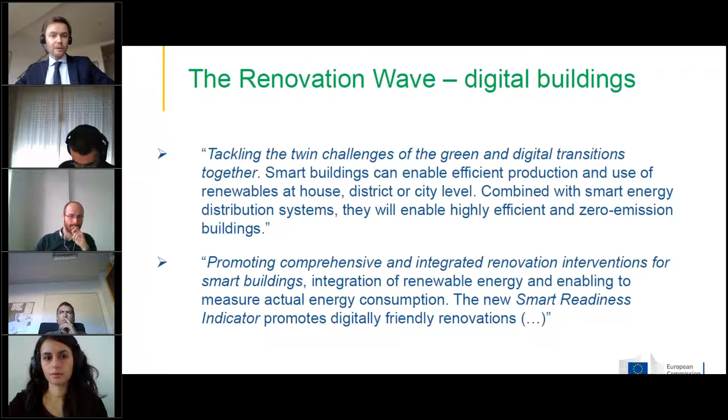Smart buildings are also highlighted in the areas of intervention of the initiative as a key component of comprehensive and integrated renovation interventions. In relation to this, the Smart Readiness Indicator is referred to as an instrument that can promote digitally friendly renovations.

The Smart Readiness Indicator is, I'm sure, something you've heard about, because at least some of the projects represented in this consortium had to take this initiative into account, even at the stage of proposal preparation. Just to give the context: in 2018, the revision of the Energy Performance of Buildings Directive introduced a requirement for the Commission to establish this new instrument, the Smart Readiness Indicator.

In essence, the aim is to introduce a rating of the smartness of buildings, a bit the same way as energy performance certificates allow rating of energy performance of buildings. Three areas of smartness are considered: optimal operation, response to users' needs, and energy flexibility.

So an important point with the SRI is that, though it is established under the Energy Performance of Buildings Directive, it goes beyond energy performance in terms of scope.

The development of this SRI has been supported by 2 technical studies, and Mr. Verbeke will give you further details afterwards. Just to mention that it has represented a tremendous amount of technical work and extensive consultations with all stakeholders.

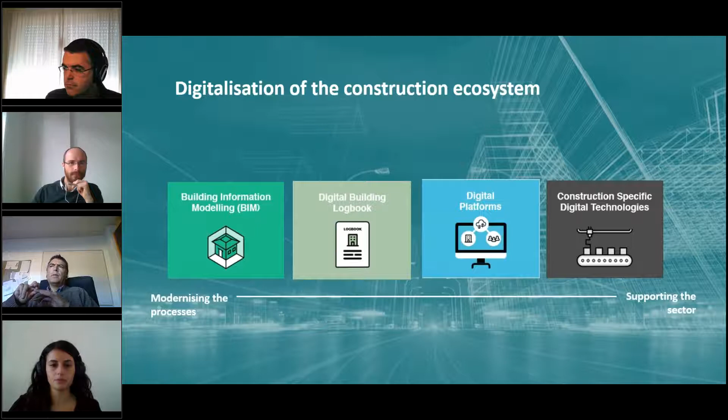One very good example of how we can valorize the information available is the digital building logbooks. They are such an example of optimizing the sharing of information. They're also a very good example of how the digitalization of the construction sector can contribute to smarter buildings and the other way around. Digital building logbooks act as a single repository of all building-related data, and they can improve data availability and collaboration across the value chain and the construction stakeholders.

As a result, they can contribute to the European data economy, and when data governance issues and data sharing models are in place, we can really imagine a huge contribution of the digital building logbooks to the European industrial and data strategies.

Also, they can play a lot of role in making information available about equipment, materials, and products that have been used in every building, their quantity, their recyclability, their performance, many information linked to that, therefore enabling circularity in construction. And this was already validated through the new Circular Economy Action Plan, which mentioned clearly logbooks as a tool that can really contribute to the circularity of buildings and the built environment.

The Commission is currently working towards an EU framework for digital building logbooks through a dedicated study. Later in the workshop, the project leader will present you in detail what is the work that has been done through the study to define the digital building logbooks, to analyze and assess existing initiatives, their gaps, and propose actions to the Commission and ways forward.

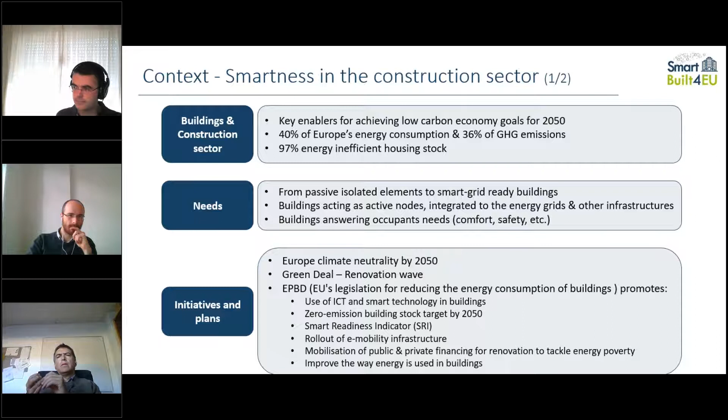And what is important is that most of the technology, most of those technical barriers have been or are currently tackled thanks to many collaborative research and innovation in EU-funded projects and national initiatives. Many of the technologies are already there. It's more a matter of integrating those technologies, having them interoperate in the context of the built environment, and trying to break silos and share data and information. So the target of SmartBuilt4EU is really to remove the last barriers slowing down the improvement of the energy performance of buildings.

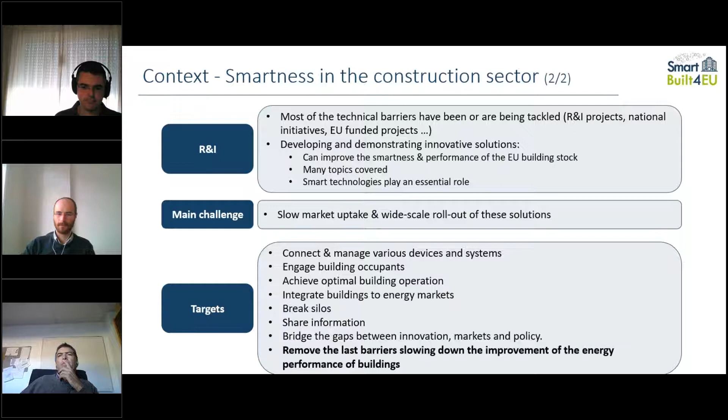So, as mentioned, our intention is really trying to integrate as much as possible this ecosystem associated to smart buildings, which is for sure complex and fragmented due to the variety and heterogeneity of technologies and stakeholders involved. And the overall value chain can be structured around different levels.

There is the sub-building level with the market players related to building components, including ICT equipment, active material and equipment, renewable technologies, and so on. The building level, with players related to building design, operation, and occupation, data management, the optimization of uses including energy uses. The connected environment level with actors related to the different networks that can interact with the building. And last but not least, the regulatory and financial framework level with actors who can incentivize and promote more sustainable energy systems and behaviors, more inclusiveness in the built environment, and innovation in the domain.

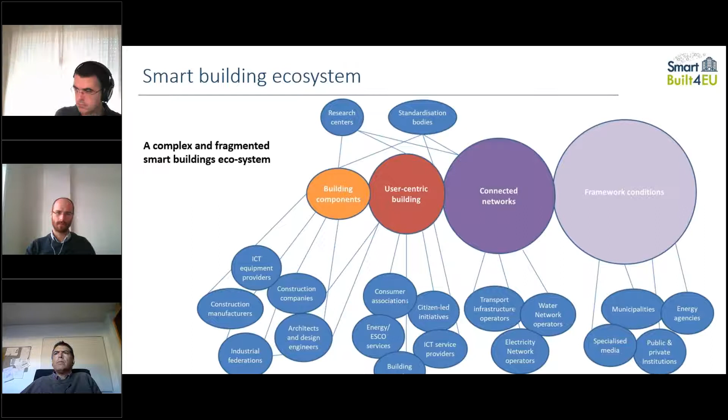And Electra introduced this a little bit with respect to those regulatory and financial frameworks, including public procurement.

So the project objectives, in a nutshell: mapping and consolidating the smart buildings innovation community in Europe, but also potentially interacting with actors outside Europe, sharing the knowledge and having a set of supporting activities for this smart building innovation, in particular through task forces and workshops. We'll be back to that point later on.

Contribution to the promotion, experimentation, and rollout of the SRI as a follow-up of the two first studies on the SRI, and the upcoming one, which is dedicated to implementing the SRI at national level. And at the end of the day, being able to keep on feeding the European Commission and the European Union as a whole with research and innovation activities, potential future research and innovation activities, and policy recommendations. And this last one will be, of course, through some kind of strategic research and innovation agenda.

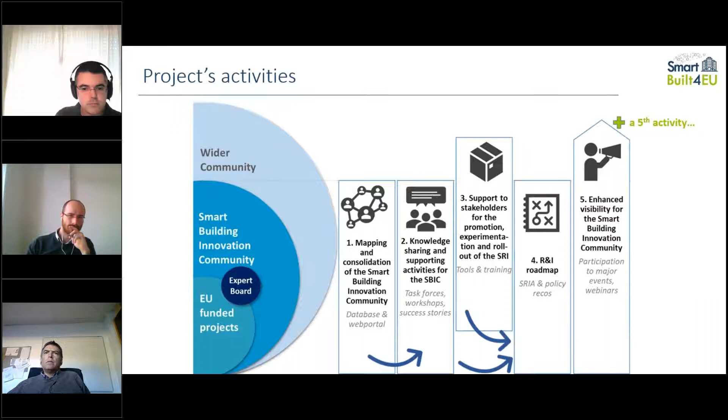So the activities are this one, plus a fifth one, which is about enhancing visibility for the smart building innovation community. We expect to leverage the EU-funded projects and some key players and key experts through an expert board, through a smart building innovation community where we expect that all of you will be happy and keen to participate, and I would say the wider community of all those who are at least interested in what we're going to develop.

So I'm just having a quick look at the various activities without getting into the details because time is flying. But the first activity in terms of mapping and consolidating the smart building innovation community is summarized in this slide. It's about having as comprehensive as possible identification of innovation leaders and potential replicators, and having those ones being active partners in the smart building innovation community. For that, we target in particular the EU-funded projects and consortia, so all of you who are going to present some very, very interesting projects in the area, and trying to foster interactions at all levels, including the national and regional level, and not only the European.

And we plan to do so, of course, in particular through a web portal that will integrate and build on existing web resources. This is ongoing because the project has just started, as I mentioned, 3 weeks ago, but we will rely on some well-established existing web resources.

The second activity is dedicated to this notion of the very active community relying on publicly funded research and innovation projects, the wider community from smart cities and their networks, from industry R&I partnerships, including those under preparation of the Horizon Europe Framework Program, and some consumer and citizen-led initiatives.

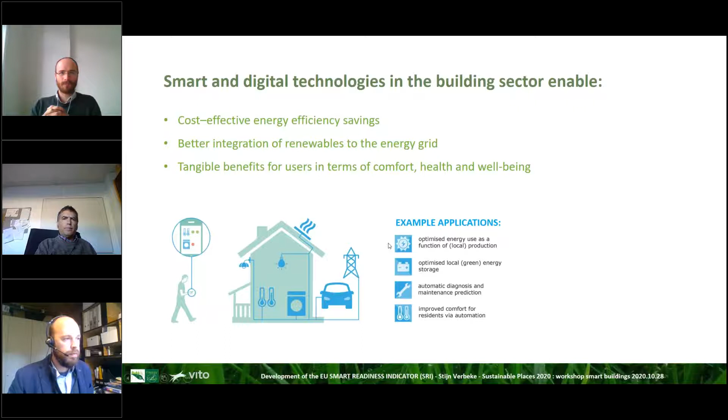Well, the context was very well introduced by earlier speakers, so all of you are aware that smart technologies have tremendous benefits, but the conclusion is that in the broader public, these benefits are not always well known. Also, the building sector can be more of a traditional nature.

And hence, in the review of the energy performance of buildings directive in 2018, there was an article noticing the introduction of a common union scheme for rating the smartness of buildings, the Smart Readiness Indicator. So it was already in the EPBD in 2018, but the EPBD at that time did not specify how this SRI method would be calculated. It's just a concept of an indicator.

And the intention of what it should do, so raise awareness and motivate consumers and support the uptake of technology innovation. But the real details of this indicator needed to be further developed.

What the EPBD did include in its Annex 1A were three main elements that should be considered in the evaluation of the smartness of a building, namely the way in which a building can interact with its inhabitants and its users.

So managing the operation without too much involvement of the users, but also providing information on actual performance, etc. Second one is making use of these smart technologies to make your building operate more efficiently. And third one, also very importantly, is to make sure that your building can interact with the grid.

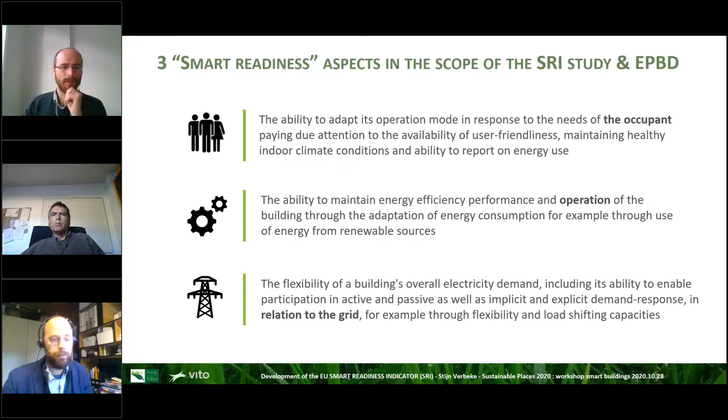So these were the main elements, but to have this further elaborated into a feasible assessment scheme, DG Energy commissioned two consecutive support studies, one running from March 2017 to August 2018. And actually it was during the execution of this study which explored the benefits of SRI that the EPBD was already updated. Then a second technical support study which ended at the end of June 2020.

And Vito had the pleasure of coordinating both technical support studies. Of course, they were executed with a consortium, and the second consortium was including Waide Strategic Efficiency Europe. And so the study further developed the methodology, but also looked into implementation pathways and the impact of this instrument across Europe.

In the coming few minutes, I will highlight some of the main elements, but of course, there's much more. And if you want to know more, on our website smartreadinessindicator.eu, you can find both a summary, which is hopefully quite meaningful and readable - I believe it's 25, 26 pages - but also the full report together with its annexes, a few hundred pages in total.

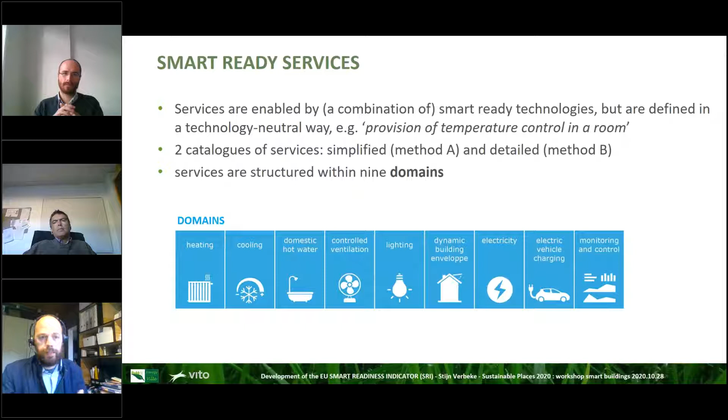To give a bit more detail, we ended up with having 2 catalogs. We have the detailed method, which is suitable for more intricate, more complex buildings such as office buildings. But we've also devised a simplified method for residential buildings to further ease the methodology for this specific type of buildings.

The core of the assessment is for an assessor to go through a building and check the functionality levels implemented. Here you have an example on heat emission control, various functionality levels from a non-smart default without automatic control to a fully automated, also checking presence control, for example. So the basic assessment procedure is checking which services are relevant and then to what extent are they implemented.

What happens next, automatically as part of the calculation methodology, is checking the impacts that these services have. We're not just counting the amount of services present in a building, we try to evaluate the eventual impacts of these technologies. There are multiple impact categories, and as mentioned before by Sylvain, it's not purely about energy. It's of course an impact category, but the other impact categories we have are maintenance and fault prediction, comfort, convenience, health and well-being, information to occupants, and grid flexibility and storage.

We think all these elements are critically important to be able to call a building a sufficiently smart building.

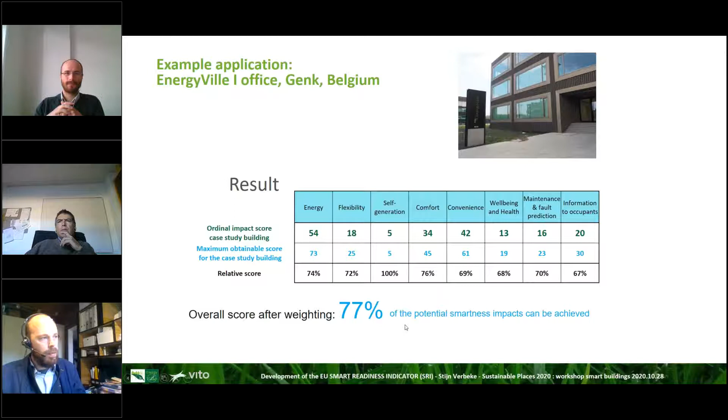Now, this is a hard number to communicate, so other steps in the process have been checking how we can, for example, translate this into an A, B, or C score, which is more easy to communicate.

During the technical support studies, we tested this approach ourselves, but also had many stakeholders participate in the testing. In total, 112 assessments have been carried out, showing the feasibility of the approach, also in terms of efforts and required expertise of the assessors.

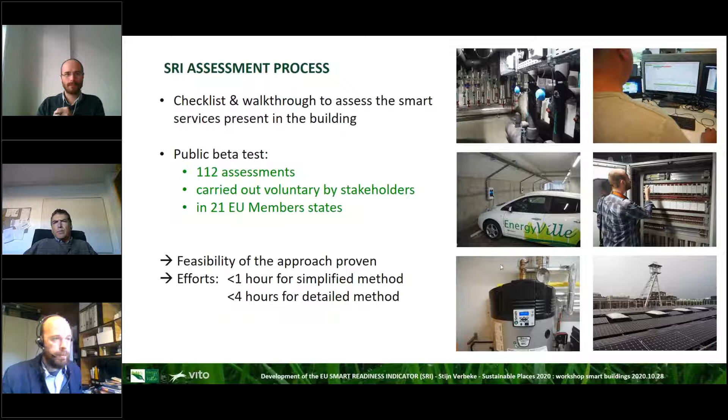For the simplified method for residential buildings, it comes down to less than 1 hour. For the more complex one, about half a day. This could, for example, as part of one of the implementation pathways, fit to be done together

with an energy performance certification as one of the potential implementation scenarios. Next, we also looked into graphical design options, tested it with focus groups, and also tested how we can convey other messages, for example, on interoperability of technical services, which is a very difficult and critical element. I'm sure we can continue that discussion in the SmartBuilt4EU project, and pretty sure many other research projects are also working on this specific theme.

We also did an evaluation of the impacts of the SRI and concluded that there are very important positive effects, and these come from two sides. One, just doing the assessments and creating this awareness. But we think equally important is that through the SRI and this list of services and functionality levels, we can also create a common language to describe different technologies and market them, for example. So this is what we refer to as both this pull effect and a push effect.

Coming to the conclusion, the technical study team concluded that it's a cost-effective instrument, that there is great interest of the market, and that the methodology is simple, actionable, and requires acceptable efforts. We're very happy to know that a few weeks ago, the Commission seemed to have agreed on these statements and have effectively adopted the core of the proposed methodology in the legal acts right now.

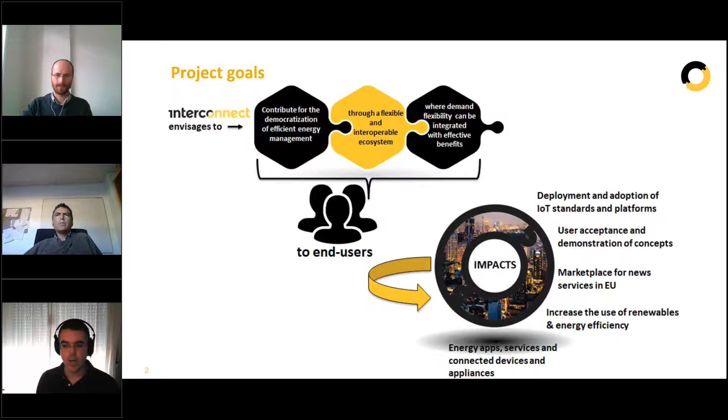So this means dealing with a lot of areas here. Some of them are quite well known for the participants here, I'm sure. So we're dealing from this front of ontology to interlink that with the digital platforms to make sure that we are able to support IoT-based solutions, blockchain implementations, on the side of the energy negotiation, smart contracts, and so forth, which relies basically on the IoT implementations. As you will see,

we have several large-scale pilots where we intend to demonstrate all of this. We also have one particularity for those that are not aware, which is the financing through open calls. So we have a cascading element within the project. We'll get to that. We need to have this integration with cloud-based systems or local systems.

So as it was already mentioned in the presentation, we are agnostic to the technology in itself. We're more concerned on the way information takes back and forth the path between the systems, and to ensure that the final service and the functionality is fulfilled. We have the electric grid, of course, to integrate all of this, and we have, I would say, transversal to this topic, big data that's being produced everywhere, cybersecurity elements and privacy tied with that, and standardization, where we are mainly focused on. So this is the path that we need to go through.

So in terms of outputs that the project is set forth in having, the function is to develop components for residential and non-residential applications. So this is the tie directly with the buildings. As you will see, we have quite an extensive set of buildings within our demonstrations where we are intending to test energy, non-energy services. And I'll detail in a while what we mean by that.

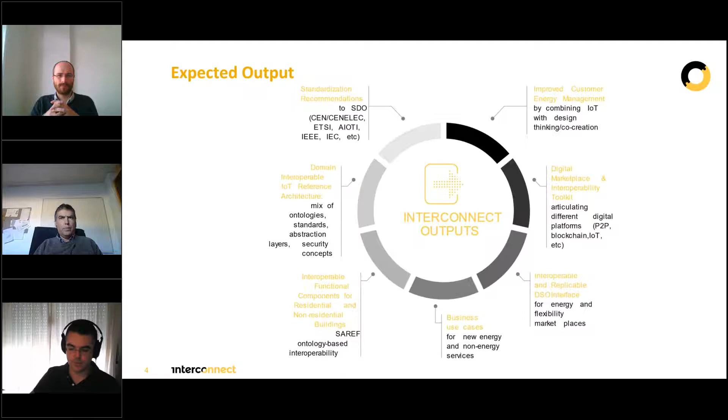As mentioned earlier, we're looking at two different domains: ICT domain and energy domain. On the ICT side, we are set to support, and these are some examples of the functionalities and technologies we're looking at depending on the application. Basically, we're focused on blockchain implementations, big data support, peer-to-peer mechanisms for service implementation, privacy-preserving functions, and cloud-enabled computing support. This does not mean we need to focus on this strictly, we can have a mix of these ICT tools and technologies provided.

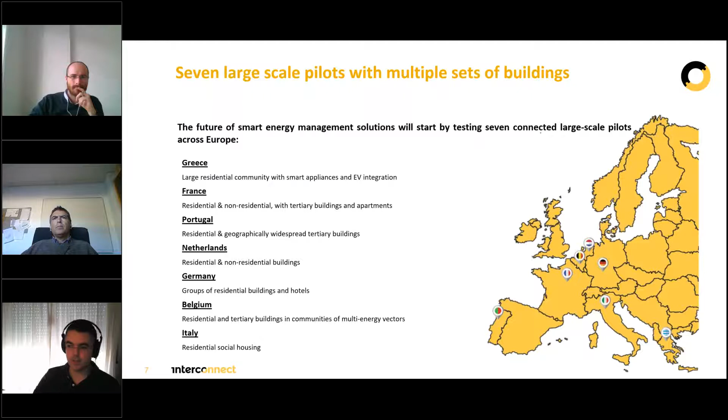So this is the kind of building and service set we're looking at—it's just an example, not comprehensive. We're looking at residential houses: independent houses, apartments, single and multiple dwellings, and common spaces where different services can be supported. One particular service being explored everywhere with different shades of gray is electric mobility, because it's a hot theme with a lot to explore across different buildings. Also non-residential buildings, including supermarkets, hotel chains, schools, offices, and even a science park. It's quite comprehensive—we should have enough background and material to study some of these implementations.

Again, there's the part of ICT and connection related, and the part of energy and services, which isn't a surprise—we've seen this already in previous presentations. Energy-wise, we're focused pretty much on the use of flexibility combined with optimal use of energy within the building, trying to leverage this together with cost reduction and actual energy use reduction, and the associated CO2 footprint reduction, not only through efficiency increases in energy used in buildings, but also through integration of renewable sources.

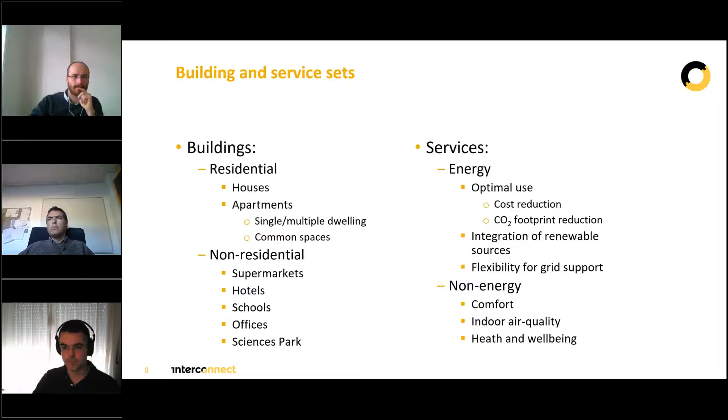On the non-energy side, we're focusing on comfort, indoor air quality, health, and well-being, which need to be tied together, as we've seen from the building classification, to provide a ranking toward the behavior of the building. It's not just about reducing energy or being more CO2 friendly—it's about making sure the non-energy system is also fulfilled. So by nature, we're a project that deals with a multi-level and multi-domain perspective.

So when we're talking about the end user, we need to clearly distinguish when we're talking about data, and one of our challenges is to make sure that the data flows within all of these topics within the different domains. But when we are talking about filtering and having data treated and available between machines, we also need to be aware that part of this data needs to be also treated and worked when presenting to the humans.

This allows, for instance, whichever is the service provider, ranging from electric mobility service to a full-blown flexibility management on a non-residential building, with HVAC systems and other systems available, that all in all, whichever is the provider, that same set of functionalities are still there, still available to be used within the user of the space in the building and the provider of the service, which can be multiple.

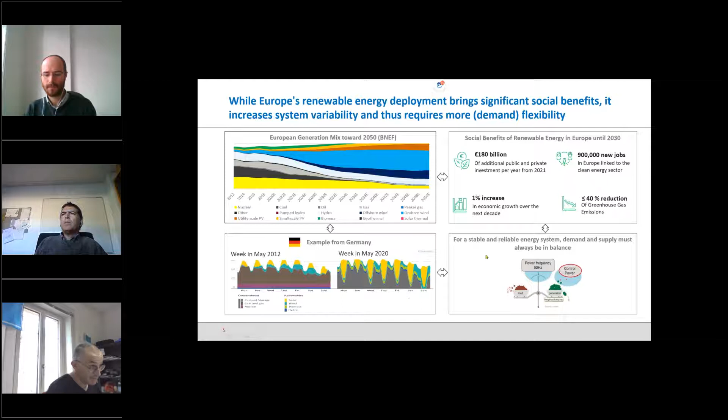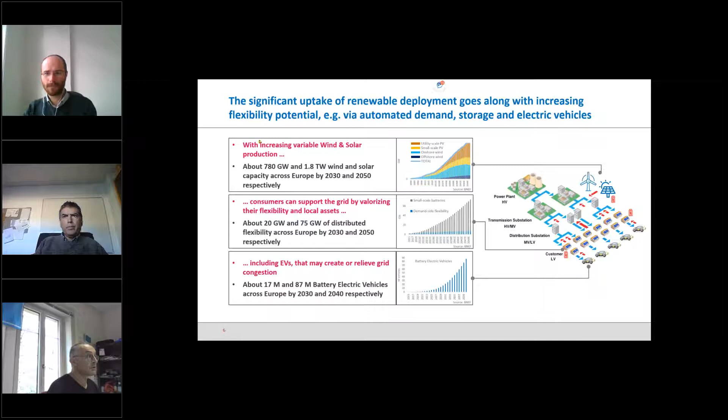So in line with what I was saying before, we have an increasing variable role of wind and solar energy. And in order to ease the introduction of this renewable energy, consumers shall be able to support the grid by valorizing their flexibility and local assets, at commercial building level but also at residential building level, whatever the scheme is in terms of demand response.

And flexibility can be appliances or storage facilities like batteries. And of course, batteries of electrical vehicles will also play a large role in that demand response scheme.

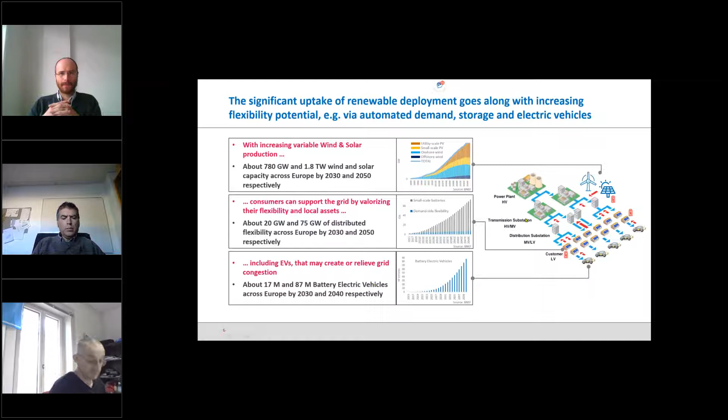So the idea of TABEDE is to develop all the necessary tools in terms of hardware and software so that any buildings can play a role in a demand response market. So TABEDE is developing what we call a building management system extender, so that if a building is equipped with a BMS that is not compatible with demand response, we will extend the BMS to be compatible with demand response schemes.

So we have 4 key objectives. Number 1 is to have a system where the extender can be compatible with any communication protocol - it's a big term, but with a majority of communication protocols - so that the solution can be deployed either locally on the TABEDE developed hardware or in the cloud.

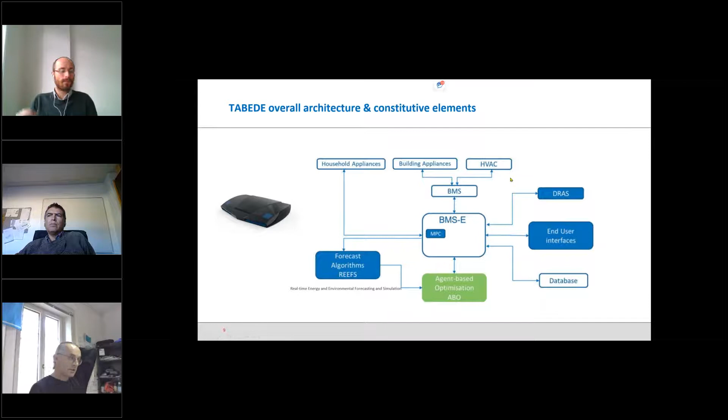So the BMS extender that is now deployed in the building looks like this Star Trek box. It hosts a computer, a small Raspberry Pi computer. So it's quite light in terms of computing power. It has several inputs and outputs.

Some communication protocols to communicate with appliances are already implemented in the TABEDE extender. We speak about Bluetooth, EnOcean, Modbus, KNX. But we can extend these protocols via USB ports, so that we can add dongles to be able to speak Zigbee, Z-Wave, and so on. And we have several user interfaces like LEDs to give some status and so on.

So going more into what is implemented in terms of firmware, inside the box will communicate with the devices via what we call SYNC adapters, so in fact drivers. And inside we speak JSON and MQTT to communicate with the key analytics of TABEDE, namely the prediction algorithms and the optimization algorithms.

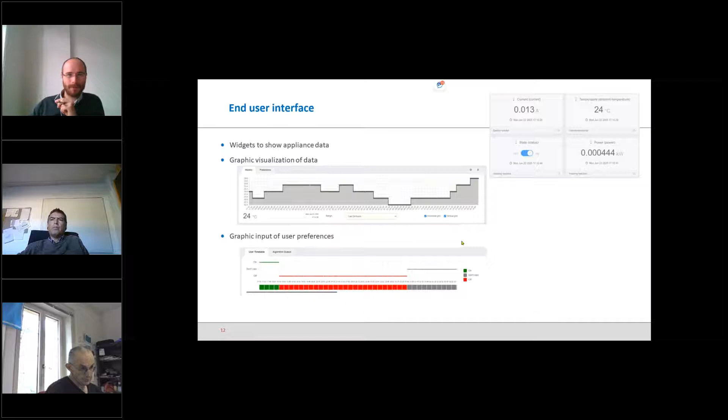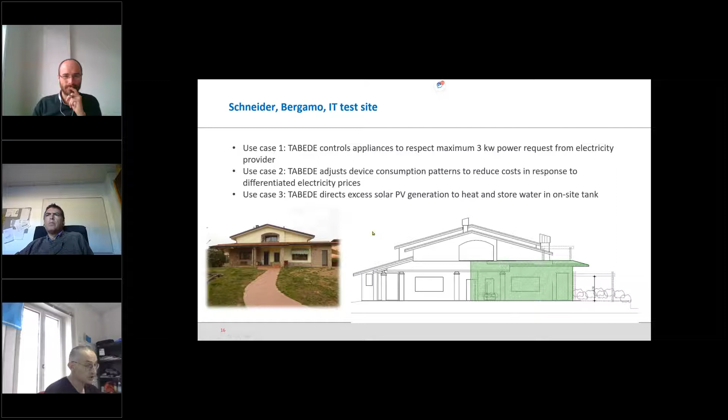So maybe I will jump directly to the test sites. We are now finalizing the deployment in a large building in Grenoble, where we will play explicit and implicit demand response. Now it's running in a residential building in Bergamo, where we have different use cases. And it's quite interesting that we have a large water tank to play as energy storage, and a residential building in Cardiff. So now the solution is deployed on the test sites, and we are collecting test results that will be analyzed beginning of next year.

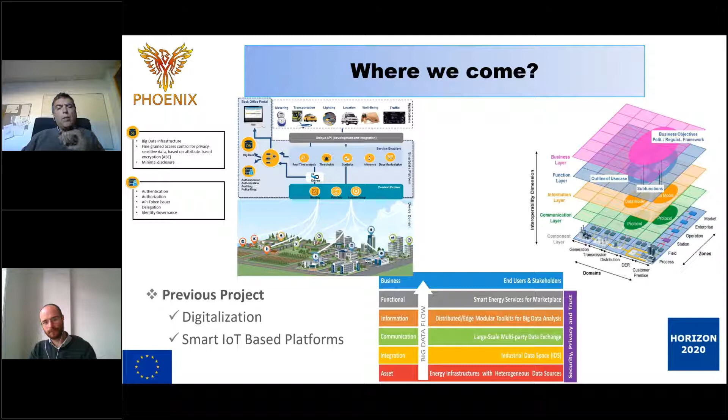One of our latest projects was Entropy, which was about changing user behavior in relation to energy efficiency in buildings. What we created was a platform layer based on FIWARE, where we were able to collect different kinds of input data coming from sensors, external sources, etc.

We created a homogeneous treatment of the data with semantic enrichment based on a standard like NGSI-LD, which is being pushed now as part of ETSI, in order to create a common data model. Over that, we use different ontologies, in this case SAREF or others, so that at the end we have a repository with all the information integrated from different sources, enabling analytics and prediction models that take into account weather conditions, energy consumption, and pattern behavior.

Based on all of this, we're able to generate recommendations to the user, trying to modify their behavior. For that we used different kinds of tools, including gaming and virtual reality tools, with the objective of seeing the effect and getting feedback from the user, to understand how we can improve their behavior overall.

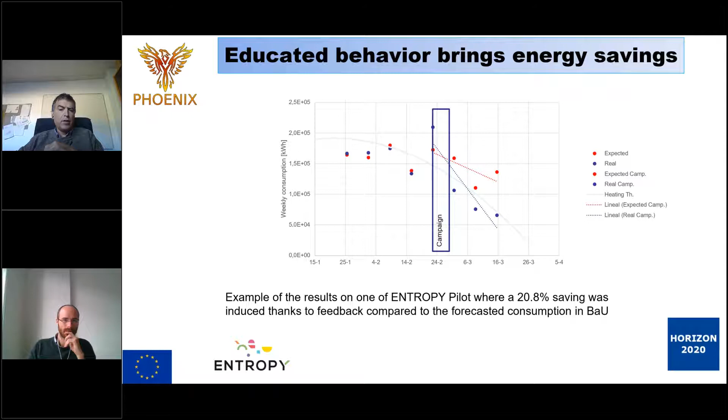At the end, as I already mentioned, we use applications like personal apps or games in order to try to push this change on the end user. We demonstrated very clearly that based on the change of behavior of the individual, there was a quite relevant improvement on the energy saving of the buildings. So taking that into account, this is where we come from.

In order to try to increase the smartness in existing buildings, on one side, we integrate legacy devices that are most common in most buildings, but also take into account the capabilities we now have based on data integration and analytics that we can create from different sources, in order to try to make them more active, more intelligent, more smart in the way they interact with the user, but also how they interact between themselves in the whole building, so that we can create an ecosystem that can increase the performance and behavior of all the aspects linked to the behavior in the building.

So that's why it's quite important. The mission here is to have a portfolio of ICT solutions that are able to increase the smartness, taking into account not only energy efficiency, which is obviously important, but also other aspects already mentioned for the SRI, including the comfort of the user, the friendliness of the interaction, and the capability to really allow them to change and improve their connection to the solutions that we can generate in the buildings.

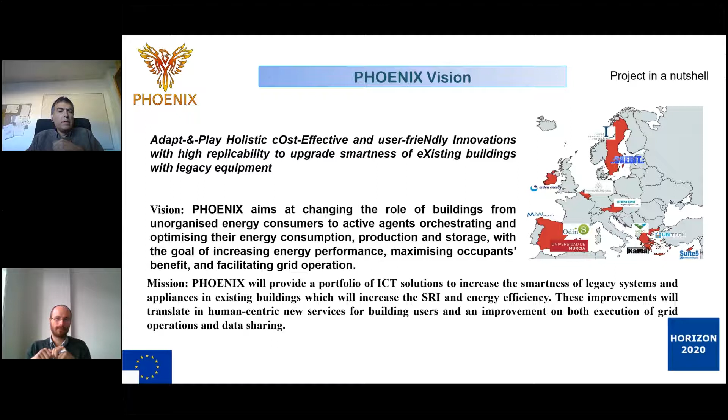So for doing that, our project has several objectives. First of all, one of them is to provide this kind of adapt and play - that is basically what is coming also in the name of Phoenix. So how to facilitate the mechanism so that systems that are not smart can behave a little bit more smart.

For example, I liked also the previous presentation about the solution they have about integration of the extended BMS, because it's something we are also working on - some kind of gateway that is able to talk with the legacy systems on one side, but then standard protocols for the IoT on the other side, and that allows integration of a lot of legacy systems inside the platform and inside the new solution that we can bring there.

Also, as I already said, the idea is to create some building smartness hub, in the sense of how, once we are able to interact in a certain way with the different kinds of devices in the building, to create some kind of innovative intelligence mechanism that allows us to understand and modify certain kinds of behavior on the device, but also in the interaction with the user.

And for that, we want to have a hub of components that in some cases will be based on artificial intelligence, in other cases will be based on rules, etc. That will be used in order to create different levels of interactions, as I already said, and modification of the behavior of the system, or in interaction with the end users.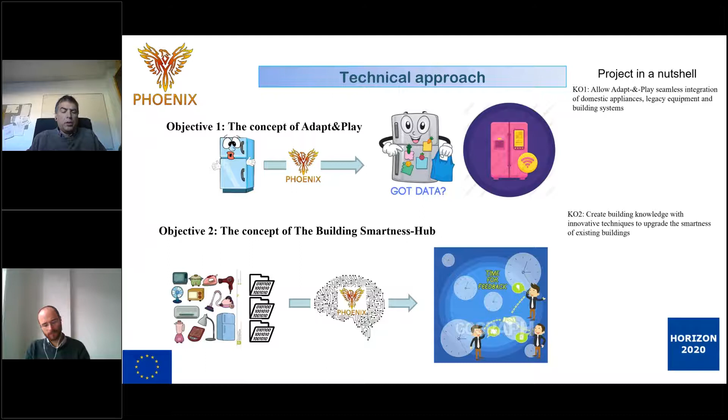So another important element, aligned with what Interconnect was talking about, is how to support some kind of meta models, like this lingua franca for interoperability.

I think it is quite important, and many initiatives at European level now are working in that direction. If we think about demand response, they are already working on ways to allow interoperability. If we are talking about the building area, we are talking also about different ways to define these interoperability models and so on.

The idea is that at the end we need to look for ways that we can facilitate that, so we are not imposing a certain way of implementing things, but more about how these need to interface with the rest of the components.

I think it's similar to what interoperability was mentioned, but they are talking more at the higher level, in between subsystems. In our case, we are interested at the subsystem level, how we can integrate information from different sources, how we can create the common model, and how this model can be interacting with external entities, like the demand response, the grid, and so on.

So in that sense, we want to develop tools for the people. One important thing we learned from Phoenix is that the user needs to be involved, needs to participate. We cannot assume that things are going to be totally automatic. The occupants need to have some kind of interaction, and for them it should be something simple, but also that improves their comfort and way of living, not something rigid and too technical.

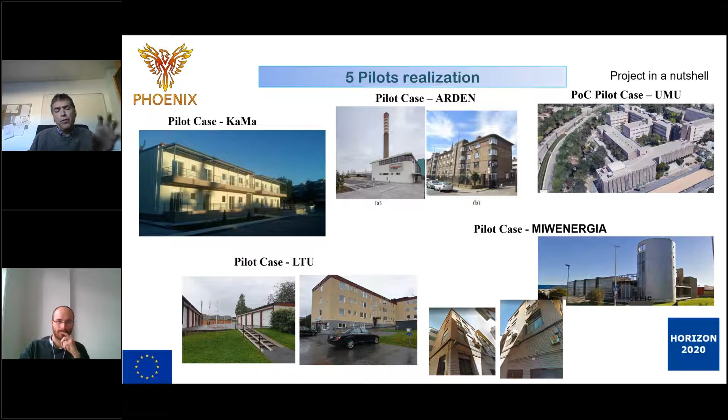For doing that, we have 5 pilots in different areas in Europe. Some of them are social housing, others are office buildings, and in our case we have a faculty already involved as one of the samples that's going to be a proof of concept. We need different scenarios with different conditions and needs, and at the end we need to harmonize the solution so it can fit different use cases, similar to one of the previous projects.

All of them need to be adapted and integrated into the common models, so that this model can later be used for different kinds of services, for data analytics, for energy saving, for automatic creation of models, to evaluate SRI performance, etc.

Over this collection of common building blocks that will interact with the different data models, we will generate different services that will help, in some cases, the users, in other cases the building owners, in other cases the interaction with the utilities, in order to work with demand response or the grid, etc.

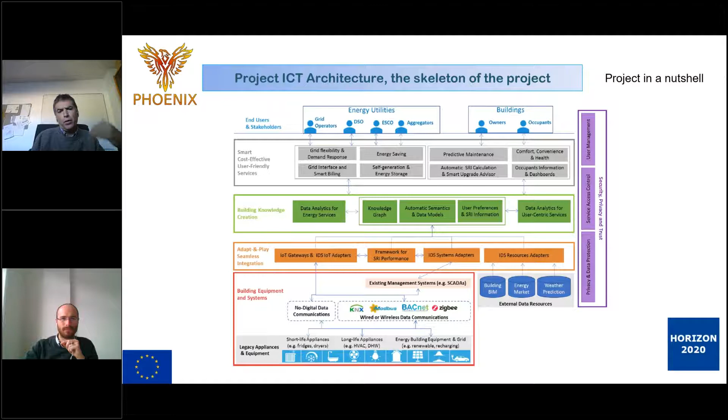So basically, for our project, we understand that the end user and the customer need to be in the loop, that's a key part. That's why we want to focus on specific tools that will also be applied to the user. Interoperability, based in our case on NGSI-LD for the smart platform, is a key concept, and the use of data analytics, prediction, forecast, etc., to manage the different information we're going to collect from the different sources.

For that, important aspects are all the issues regarding how to control and define who can access what data from whom. We will integrate all these security and privacy enablers that will be part of the architecture I just mentioned. And that's all from my side.

Thank you, Antonio. Thank you. Sorry for rushing you in the end. No problem, no problem. Just a very quick question on my side.

You mentioned the development of technologies, making the domestic appliances smarter. I did not understand - will you develop them within the project, or will you foster innovation and collect those technologies?

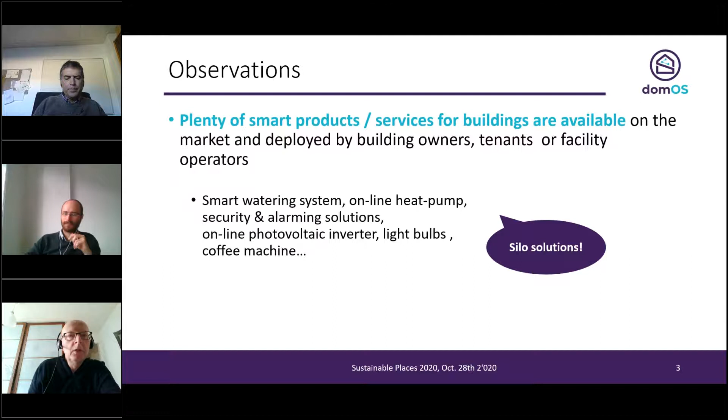Maybe we have seen that today, and I just want to remind it shortly here. There are plenty of services, smart services for buildings, available on the market. I listed some of them here, and if you look at them, they are basically independent silo solutions, and this leads to several problems.

The main problem is the lack of integration. We have multiple gateways, sensors, procedures for access control, web pages, and so on. We don't have any single point of access to all of these services, which would be nice for building occupants. The second problem is that developing a cross-product or cross-service solution is difficult or highly complex.

We have also seen several times this morning that we need a kind of choreography between several components - let's say the photovoltaic inverter, the grid, the battery, the heat pump, the blinds, the lighting. All this is interrelated, and it would be desirable to have a way to integrate all these components in an information system, in a control and monitoring system.

So one of the key topics here is interoperability, as we see. To reach interoperability is complex because there are many stakeholders with not always compatible interests, and also this domain is open to competition. It's not a regulated domain, so basically every building owner does what he wants. This is technically not so difficult, but from an organization standpoint it's more difficult because you have to align all stakeholders.

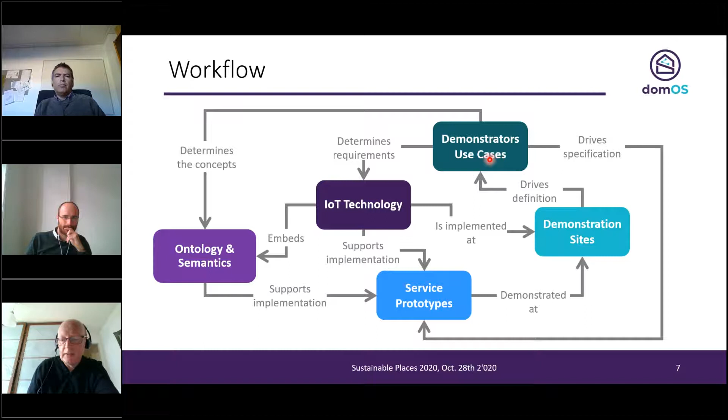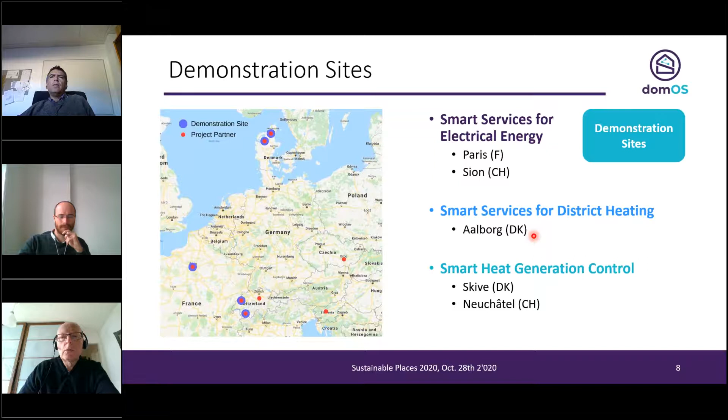Okay, so we'll address basically 5 topics, mostly for residential buildings. We will address energy flexibility, either for integration of buildings into the electrical grid, or for peak shaving for district heating, and also for maximization of self-consumption.

We will have control services for energy efficiency. The idea here is a distributed control system to reduce the heat of the water circulating in the heat distribution system. We will do some machine learning on heating system data to find bad configurations or enable predictive maintenance. The final goal is more energy efficiency, because we saw that many heat pumps, for example, were not optimally configured, and we can detect this situation.

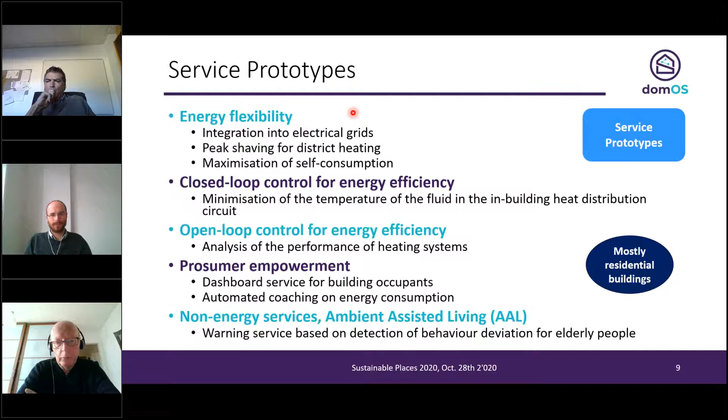Another important point is prosumer empowerment, and we also want to integrate non-energy services into this environment - one of them will be demonstrated in Paris. So here you see our 5 topics and which of them are demonstrated at the different demonstration sites, though I won't comment on each individually.

A few words on IoT technology. We already spoke a lot about this, so let me just explain our approach. The idea is to provide something like an API for applications - where applications is another name for services - so that applications or services can access information elements in a coherent way, like the temperature in the lounge.

The application should also be able to deal with access control and authentication in a standard way, and we would like to implement a privacy control mechanism coherently. We want something like what we're used to with an app on our smartphone: when deploying a new service for the house, as a house owner I may decide if this new application has access to certain peripheral information elements. If these information elements are present and the end user allows it, then the service may use that operation.

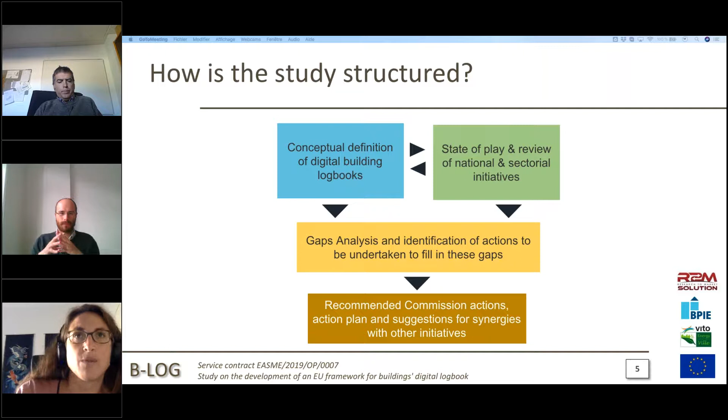And finally, thanks to this gap analysis, we have listed a certain number of actions, and together with the European Commission, we have selected a smaller number of priority actions and corresponding action plan and suggestions for synergies with other initiatives. This is the last task, and we are still working on it, and we will present this very soon, as already introduced by Electra.

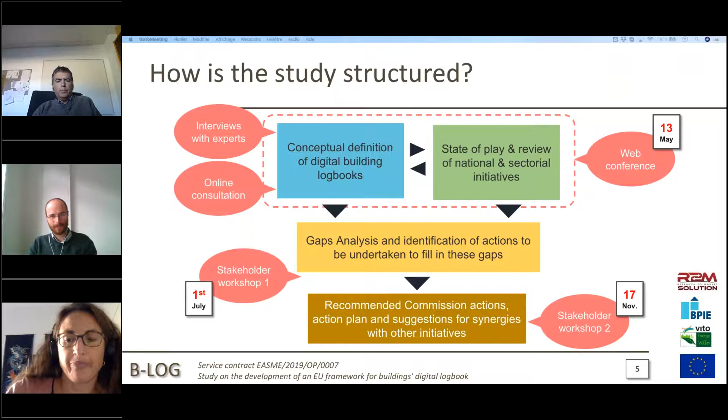And our next event will be on the 17th of November. It is at this event that we will unveil the recommended Commission actions that we have come to.

For instance, it's important to have the building logbook initiatives based on previous studies, tests, stakeholders' experience, etc. in the country. Something important also is to be able to ensure regular updates of the content of the logbook.

It should be also easy to use, user-friendly. There should be a process for data validation, so a clear legal framework, a clear scope of the building logbook, alignment with other initiatives and standards, and detailed information about what should be provided by the different stakeholders in the value chain and what should be their role in the logbook.

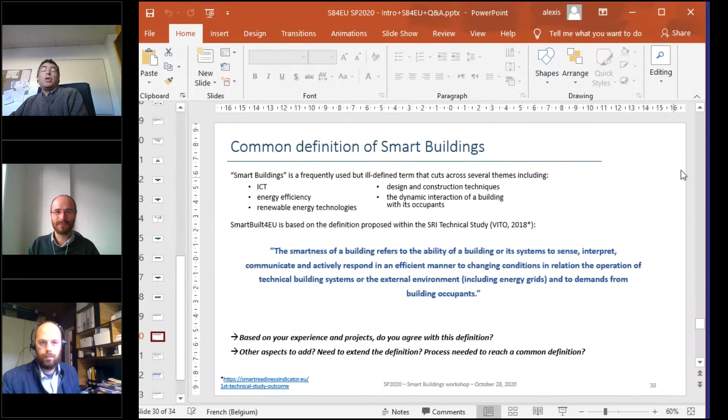I was checking the definition, and for me it's quite complete. The only thing maybe I should add is something more user-centric, also on the way to perceive the smart building, because this is more system-centric than user-centric, I would say. So maybe just a small adaptation to the sentence: efficient manner to changing conditions and to adapt to occupant needs and preferences with the adaptation of external and internal environment, something like that.

I can put it in the chat. Yes, something that tunes also the idea of how we involve the user. I think it's here, to involve the users.

Any other comments? So I read: efficient manner to changing conditions and adapt to occupant needs and preferences with the adaptation of the external and internal environment. Okay.

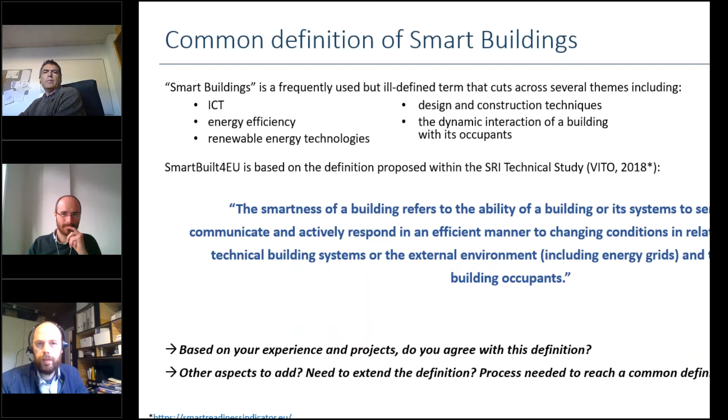Well, I think that was another point you presented in your project, such introduction, an important point in Phoenix. I do agree that's an important point, and it was the same for the technical support studies on the SRI, but it is already in the definition we proposed initially. The last element of this sentence contains building occupants.

So the reflection we had when making this definition was really looking at these three themes, namely the occupant, the building itself and its operation, and the grid.

Just to add to the discussion, at a given moment we thought of just defining smartness of a building as: a building is smart if the SRI score is high. So I want to put that on the table as well, as a more challenging proposition.

Okay, well this was a proposition. Does it appear in the report? I'm not sure. I do remember discussing it with some stakeholders. I don't think it made it to the final report, but maybe someone might comment on it during this session.

Yeah, but the problem is where you fix the threshold to decide when it's smart or when not. Well, right, but Stein, I think you mentioned the fact that you wanted to pass from percentages to a grade A, B, C. I guess that would be the threshold, right?

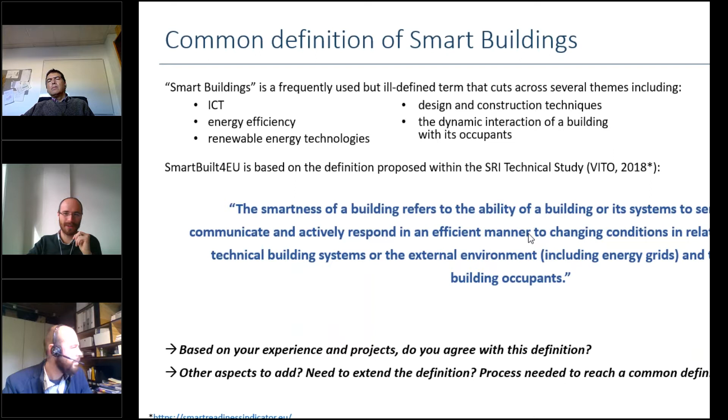I would like to remind you of the task forces that I've mentioned before, that we will organize within SmartBuilt4EU. Those task forces will gather a certain number of stakeholders, in particular coming from European projects. They will work together in order to come up with common white papers presenting the challenges, key results, lessons learned, and recommendations for actions on the hot topics identified together with all the stakeholders.

And this will be used at a later stage to be part of research, innovation, and policy roadmaps, strategic research and innovation agenda as well, in order to make recommendations and support the European Commission and member states in getting a better understanding of the state of the art, the state of play of smart building related topics.